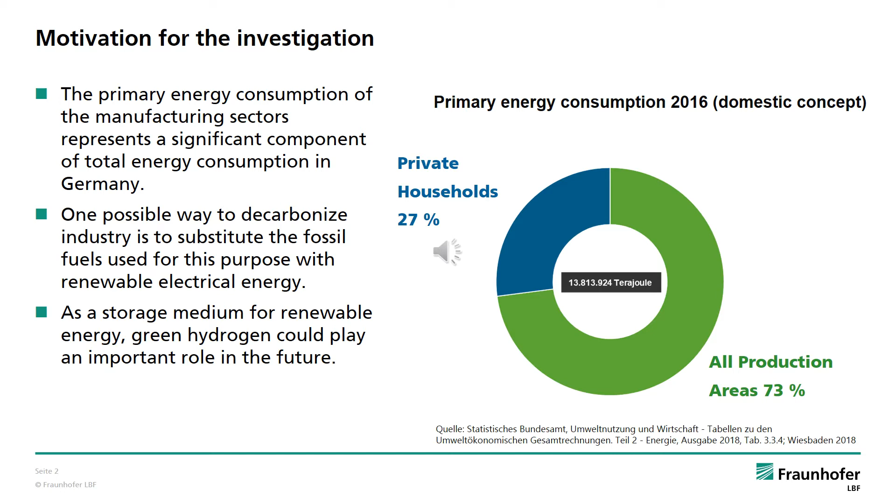One way to reduce energy consumption and thus decarbonize industry is through the use of renewable energy. At this point, green hydrogen could become very important. In detail, a large amount of energy or hydrogen is needed in the manufacturing sector. For example, in the production of materials, in detail for melting or heat treatment of steel or cast iron.

Furthermore, large quantities of hydrogen are currently needed in the chemical industry for the synthesis of basic chemicals such as ammonia, methanol, or plastics. In order to completely convert this branch of industry in Germany to green hydrogen, the capacity of renewable energies in this country would have to be tripled. This can only be achieved by importing hydrogen or derivatives. However, the use of hydrogen requires a specially designed infrastructure using suitable materials for the transport, distribution, or storage of the medium.

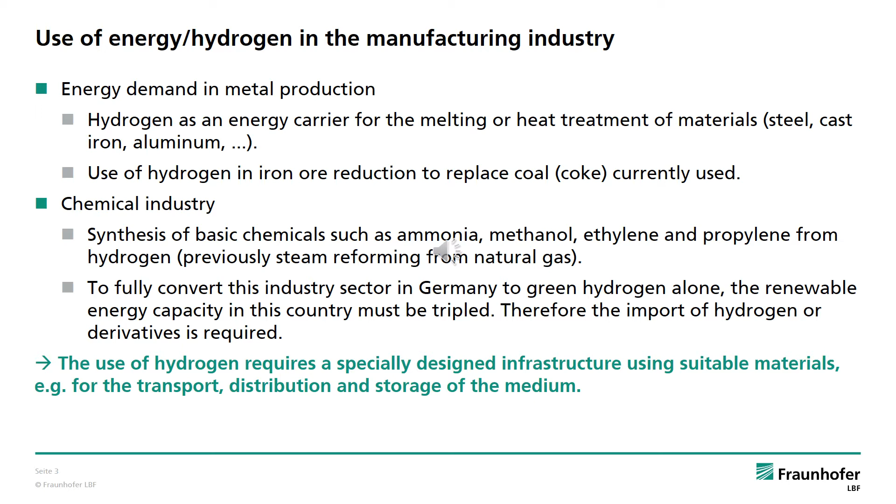In combination with metallic materials, hydrogen can reduce the strength, ductility, and the fatigue strength. In detail, the adsorption and absorption of atomic hydrogen in the metal lattice leads to a change in material properties. Cyclic loading of the materials in the medium hydrogen leads to hydrogen-induced material fatigue. Due to the different metal lattice, materials have different hydrogen solubilities and diffusion coefficients, which influence the susceptibility to hydrogen.

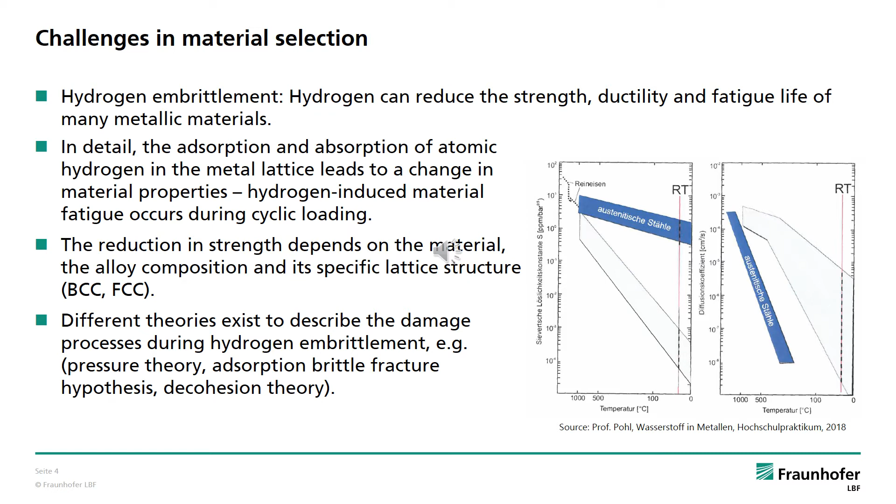This brings me to the results of the investigation. Investigations were carried out on a ferritic stainless steel 1.4521, for which I have summarized the chemical composition and material properties on this slide. With a tensile strength of 523 MPa, this material does not belong to the group of high-strength steels. From this point of view, this material should not show any particular susceptibility in combination with hydrogen. But more on this on the next slides.

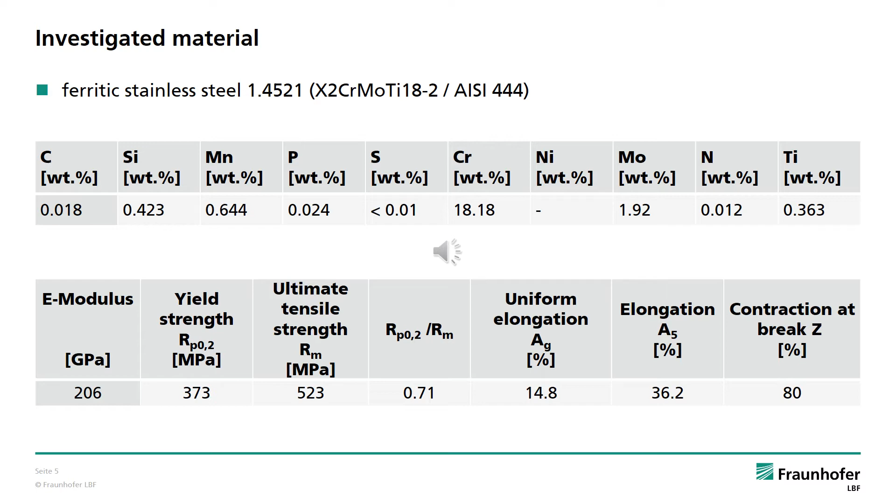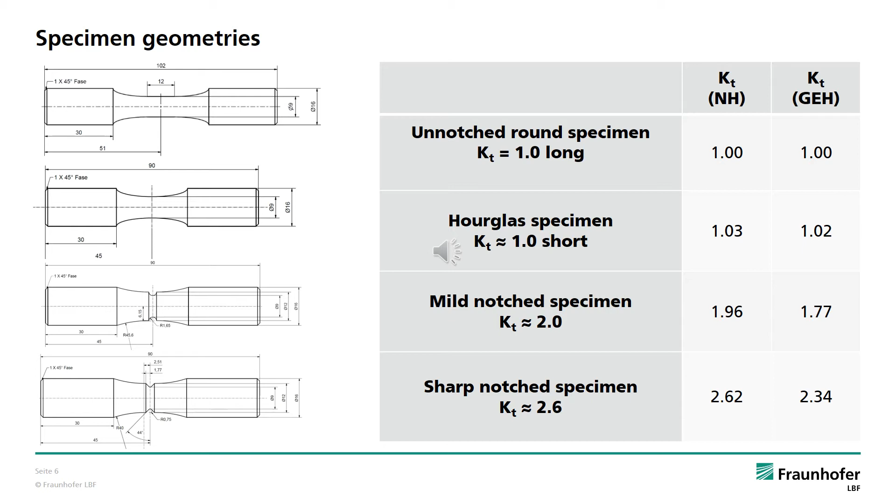First of all, I would like to go into the specimen geometries used for the examinations here. In addition to two unnotched specimen forms, which were used for the strain-controlled and force-controlled tests, two notched variants were also used. The influence of the local stress concentration was investigated on the basis of the mildly and sharply notched specimens.

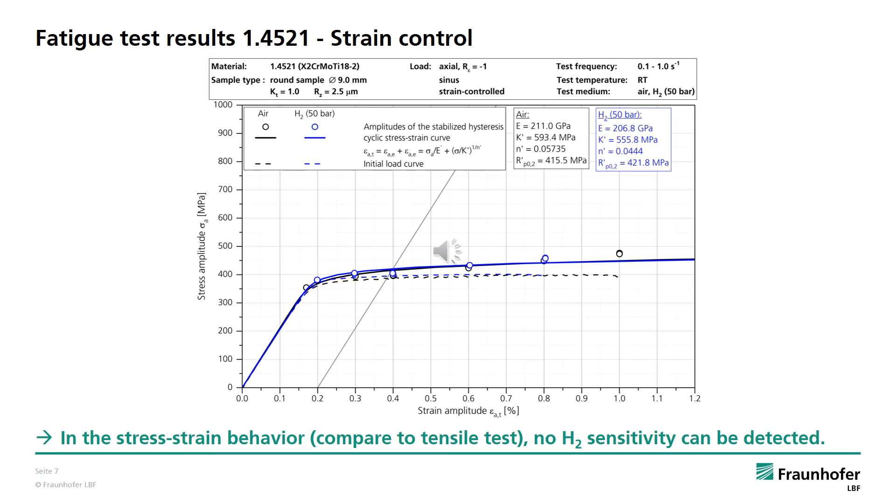Strain-controlled tests were carried out on these unnotched specimens and the results plotted in the form of stress-strain curves. Here you can see the results in black for the tests in air and in blue under hydrogen. Compressed hydrogen with a pressure of 50 bar and purity 5.0 was used for the investigations. In addition to the cyclic stress-strain curve as solid lines, the initial stress-strain curves are also shown as dashed lines. The material is slightly cyclic hardening but does not show any susceptibility to hydrogen based on these tests.

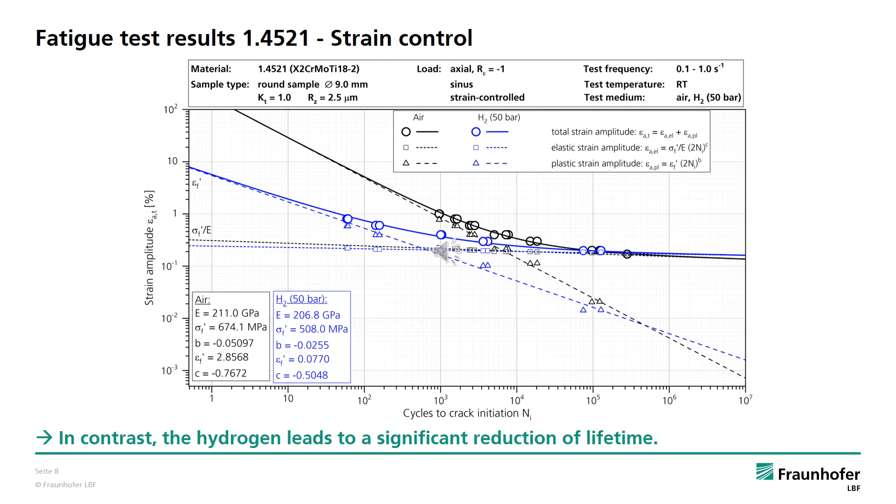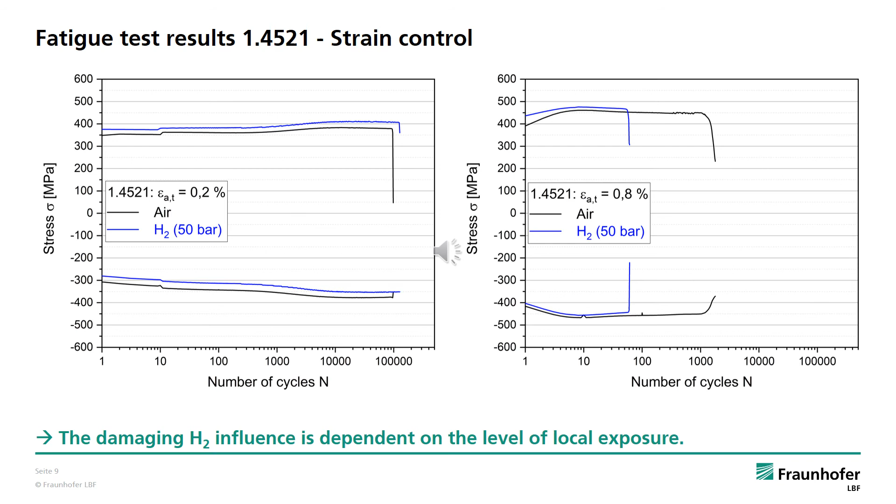This is also shown in detail on this slide with the stresses plotted depending on the number of cycles. As already mentioned, the life-reducing effect of hydrogen is especially evident at the higher strain horizon of 0.8%.

A comparable material behavior can also be observed in the force-controlled tests with the unnotched specimens. The experimental results are plotted in the form of SN curves, in black for the tests in air and in blue under hydrogen. The lifetime reducing influence of hydrogen can be observed especially at the highest load horizons.

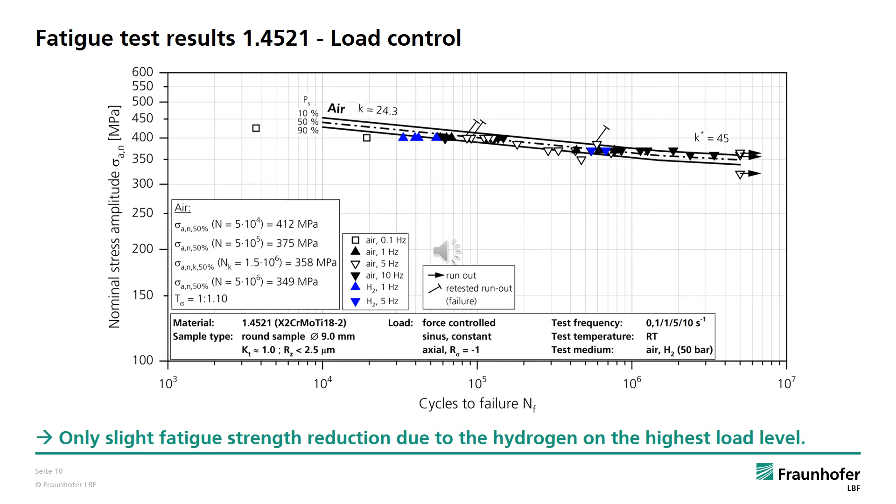This influence depends on the stress concentration and thus on the local stress. With increasing stress concentration factor, the local stress also increases, which favors hydrogen absorption. The difference in fatigue life between air and hydrogen increases with the load. The greatest difference is observed with the SN curves of the sharply notched specimens shown here. The significant influence depends strongly on the local stress and is hardly visible anymore in the area of the knee point.

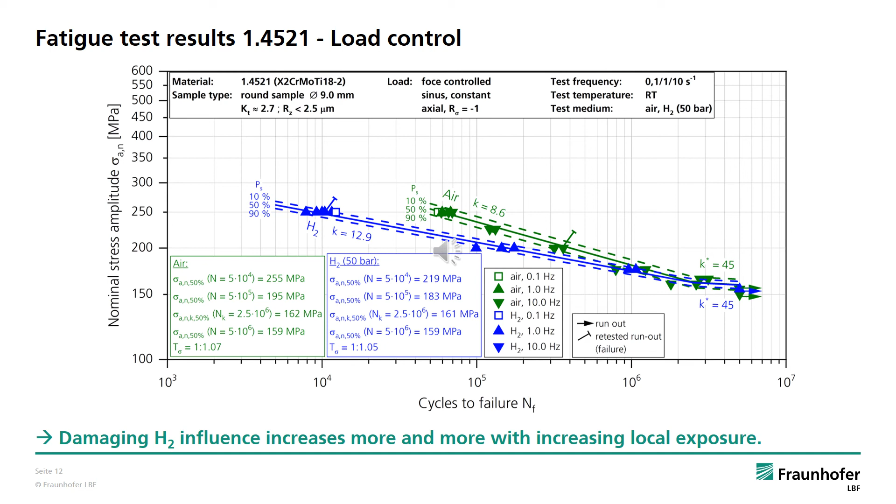Elastic-plastic finite element simulations were carried out for all tested specimen geometries to evaluate the local influence. The local stresses under hydrogen are plotted in blue, and the fatigue strength results of the differently notched specimen geometries in the other colors. While in the range of lower stresses the test results under air and hydrogen are still very mixed, a separation can be made in the upper range. Damage by compressed hydrogen occurs as soon as the stress is high enough and plastic deformation can appear. This finding is independent of the stress concentration factor and thus support effects do not seem to play a role.

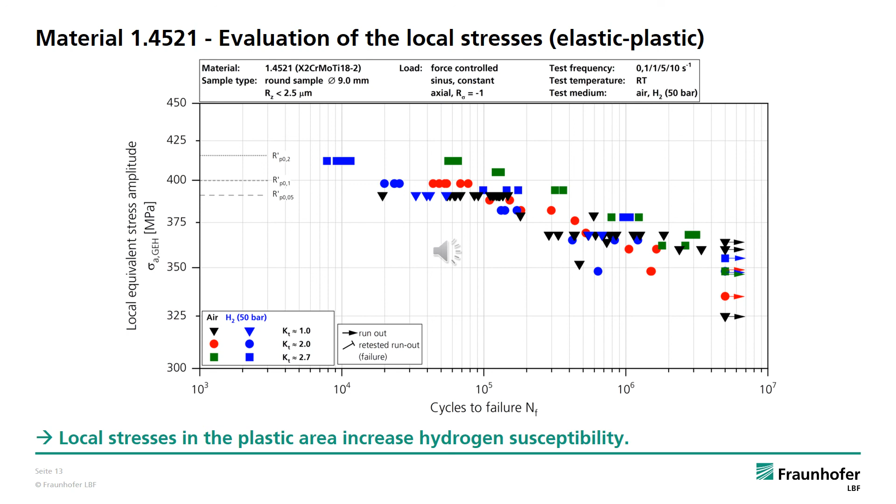Conclusion. Green hydrogen has the potential to substitute fossil energy sources. This can make a significant contribution to reducing greenhouse gases. When building up a hydrogen infrastructure, attention should be paid to material compatibility, especially in the case of high local stresses. Possible susceptibilities to hydrogen should be investigated. Cyclic fatigue strength tests are particularly suitable for this purpose. Analyses of the material behavior under hydrogen are necessary.